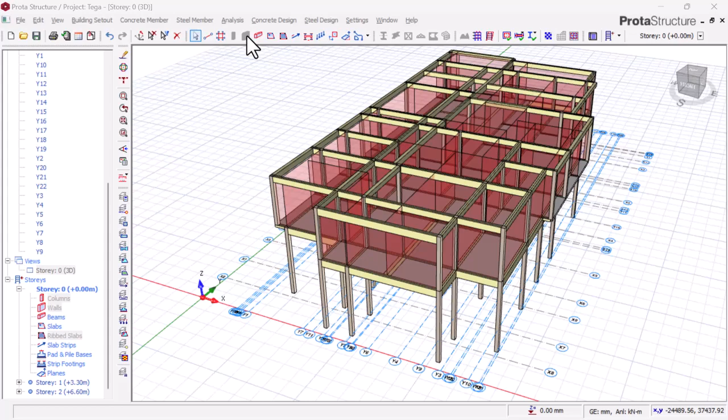Hello everyone. Today I'll be showing you why you shouldn't insert multiple footings at a go, and why it is very important for you to insert them one after the other, with this simple one-story

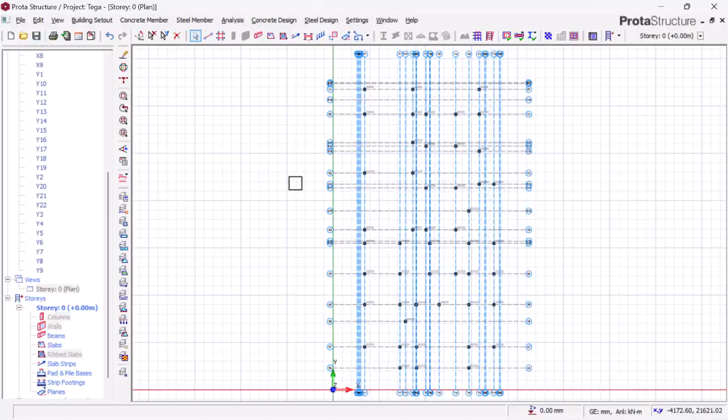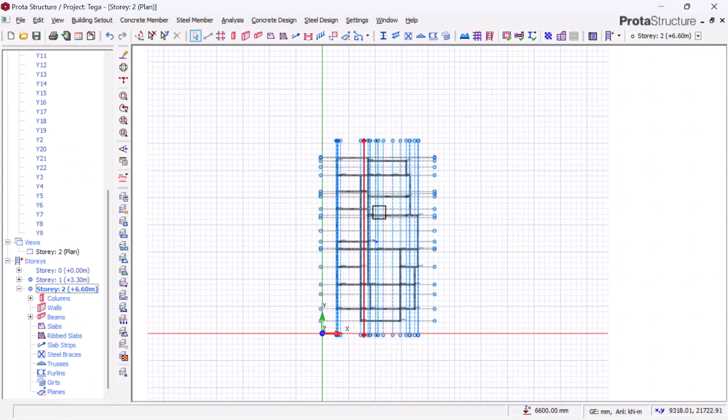Now, looking at this, you can see from the plan, this is the plan we have. So we scroll down to story zero. We have numerous plans. We have the ground plan here, which I've already modeled and finished. You can see my slab and my beam. And you can also check on the second floor. This is my second floor. This is my roof beam. So I already analyzed all these members.

So we're going to go to story zero, where we're going to analyze and design our foundation. So on this foundation, you know how we do it. You simply click on it, then you right click and locate insert pad base, you click on it, then you specify all data. Now I've already done this. I want my footing depth to be 350 millimeters.

And my soil stress, that is the soil bearing capacity, I want it to be this because we've done the soil check and this is the result we got. So I've already input it and we selected all the bars. I want it to be 12 by designing my basket in both directions, the y direction and the x direction. All data are being input. So the next thing we'll do is click on calculate. Click on calculate right away and it's going to calculate it.

So we want the square footing. You can see the design made: 1.4 by 1.4. I want a square footing. I don't want a rectangular footing. You can see the calculations being checked, shear and punching being checked. And the spacing specification is checked at 150 millimeter spacing, and the bar is 12 as indicated in our input page. So in doing this, you just click OK, and we'll go to OK.

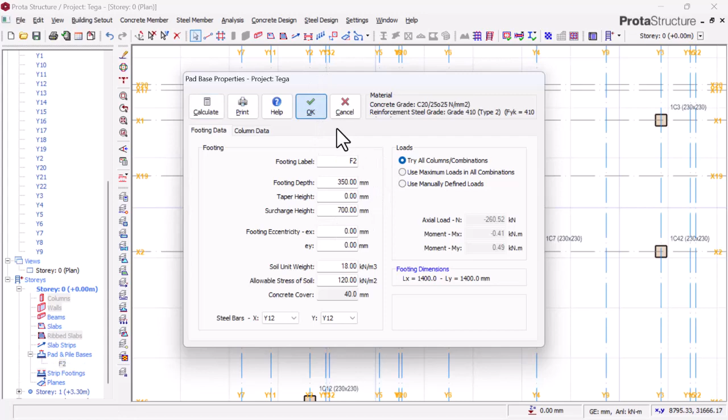And you can see here are the bars. Can we do another one? Let's just go again and do another one. We'll click on this, right click, insert pad base, you click on it. All the data is already put; you don't need to do it again once you've done it. So you click on calculate and here you can see now there's a difference. The former one was 1.4 and this is 1000 millimeters. So this is 1 meter.

So you click on this, in as much as what you have on your L and what you have in your Y span length are the same. So you can still click it and say okay, and we'll come over here and say okay. So it's going to display. Now you can see the different depths. So this is what I want to show you: why you shouldn't click all of them, why you should do them singly, just like what I've done. I did this one, I did this. Why you shouldn't highlight and do multiple.

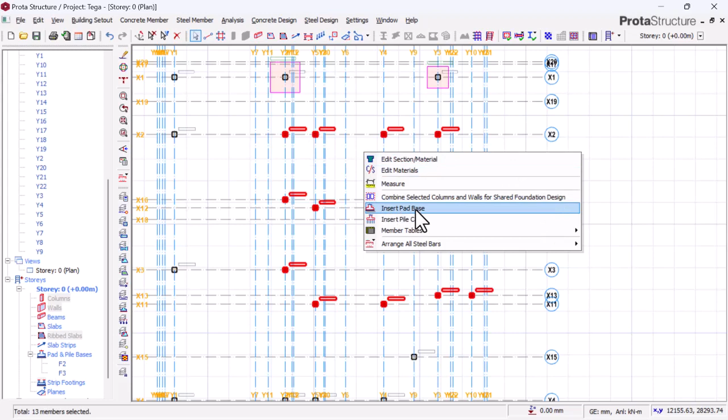So if we highlight this at a go, you can see we've gotten all these columns together. It's almost 13 columns. So why shouldn't you do these 13 columns together? If we highlight all of this and click insert pad base, you see it's telling you: create typical footing for the selected columns. So if you're doing this, it's telling you that you want to generate a typical footing.

What does that mean? It means it's going to take one load. It's going to take the highest load here. It could be this, it could be this. Like the ones we've done, you can see in this area we have 1.4 here, and over here we have 1 meter.

So if we say we are going to highlight all of them, it's going to take maybe the highest depth, like 1.5, and design for all. It's not going to specify one by one, telling you okay, this is 1.5 and this is 1 meter. So in doing this, cost wise, because when you're doing a foundation, it should also consider that cost. You understand? So that should be in your mind. So if you do this, it's just going to take one and design for all.

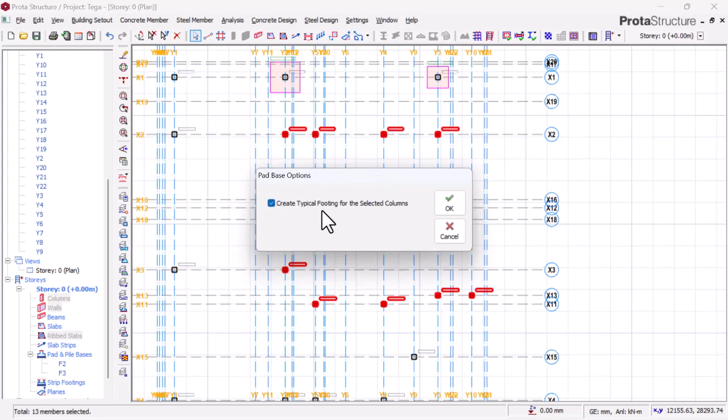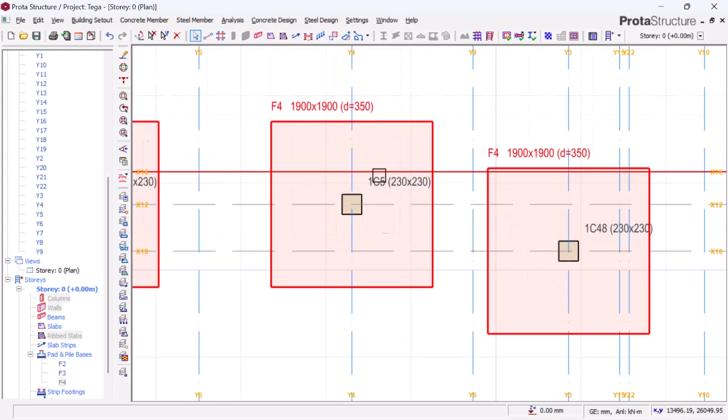So in doing this, you just say okay. If you click okay, we'll say calculate. You can see it's taking 1.9 to design for all. So if we click the same spacing and all checked, we say okay and we click okay. You can see all footings are equal. Look at all these footings, they are designed by 1.9 and they are also overlapping.

So in this regard, we shouldn't bother to do it multiple. It's not nice doing it this way. So what you need to do is take this off, and we're going to design them one after the other. It's very proper designing one after the other. You can see that this column was designed by 1.9, but if we are designing one after the other, it's not giving us 1.9, rather it's giving us 1.1, right?

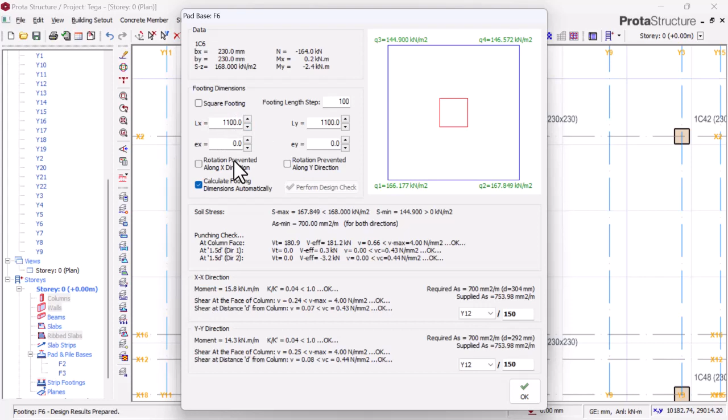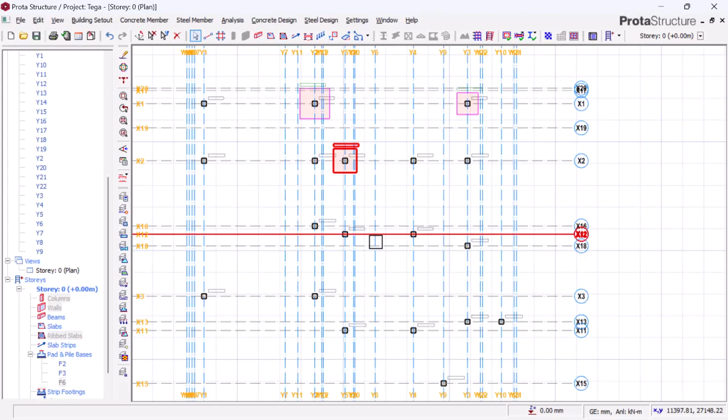So with the same spacing, we are going to design one after the other such that it's going to take each column load and design for each column load the way it's supposed to be, not taking the highest axial load and designing a similar footing. We don't want to do that. So we have to go one after the other by clicking. You can see 1.1 instead of 1.9.

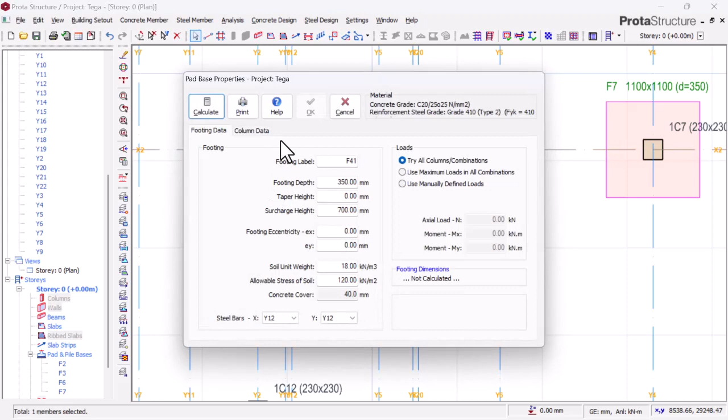You can see when your column can actually pass by 1.1 according to the load on this column that we are transferring down to the slab, so why do it 1.9? It will be very, very expensive. When you're considering cost to a larger extent, you shouldn't do that. So in doing this, we are going to trace the column that gets that 1.9.

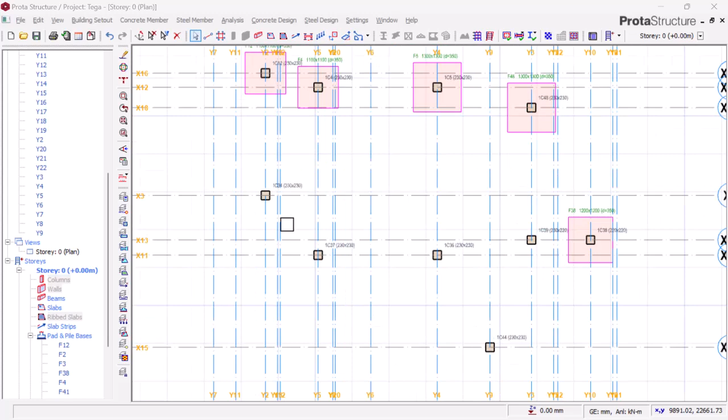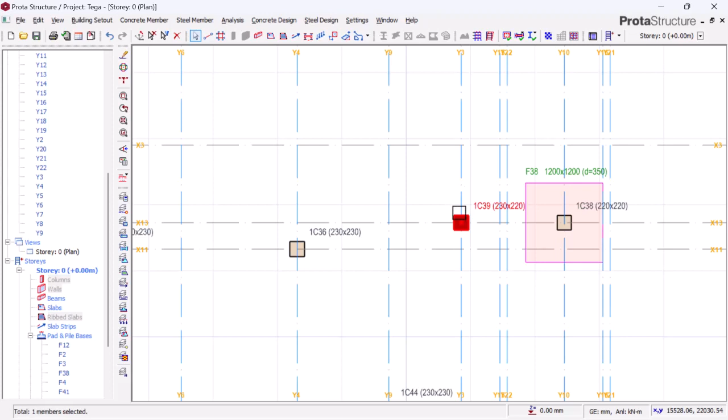So you can see I've successfully designed up to this level. We've designed all these 8 columns. I've not really gotten the one that has 1.9, because like I said, there's a particular base that is 1.9 that it used to design. So all I'm getting here is 1.1, 1.1, 1.3, 1 meter, 1.2. So I'm still trying to find that particular column. This is 1.2. So I'll keep on doing it.

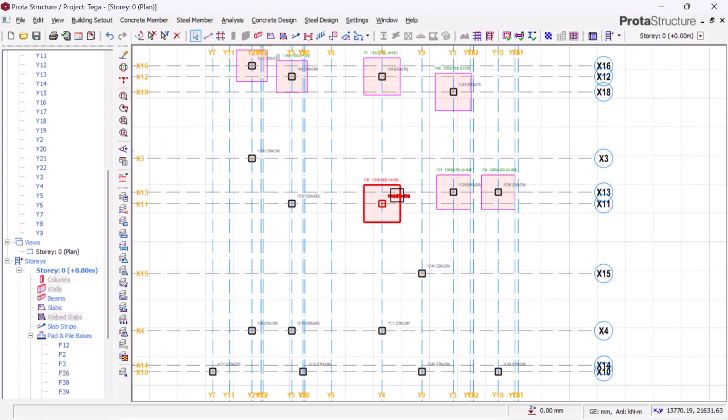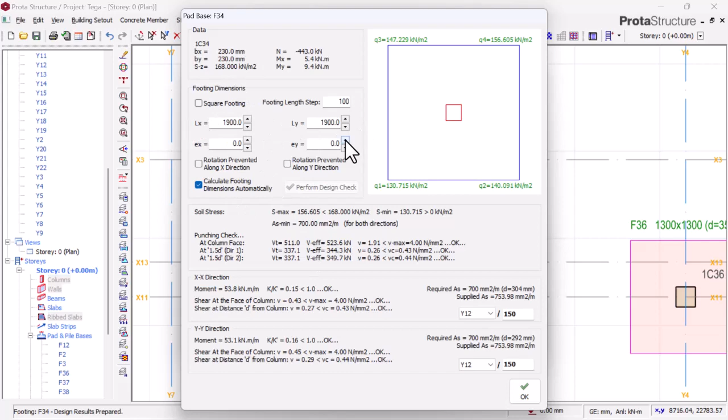1.3. Always look at this. 1.3. 1.2. Then it should be this one. Let's try and see what we've got. We'll calculate. Here we go. You can see that it got the highest. I think we have the highest axial load at this area, so it uses the highest axial load to design this footing. So this is where we have the 1.9 that the software used in generalizing all the others.

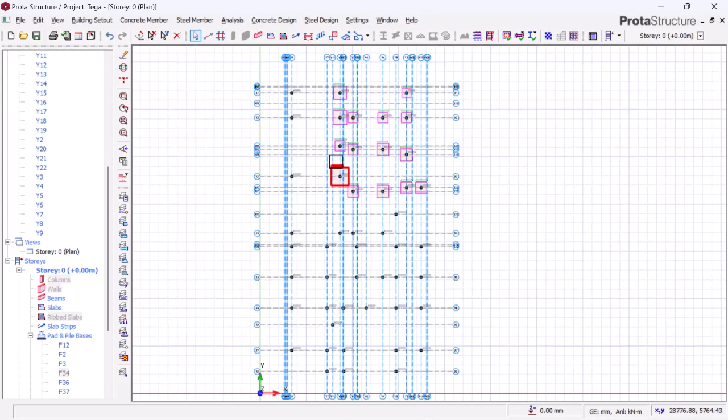So if somebody wants to run it fast, just quickly, it's not good. It's good for you to do it one after the other. It's not good to highlight all of them and just design, otherwise it's going to use the larger load, the larger base, to design for all of them. You can see it's only here that has this base; every other one has 1 meter. So it's good for you to save cost. Overall, this is a good design.